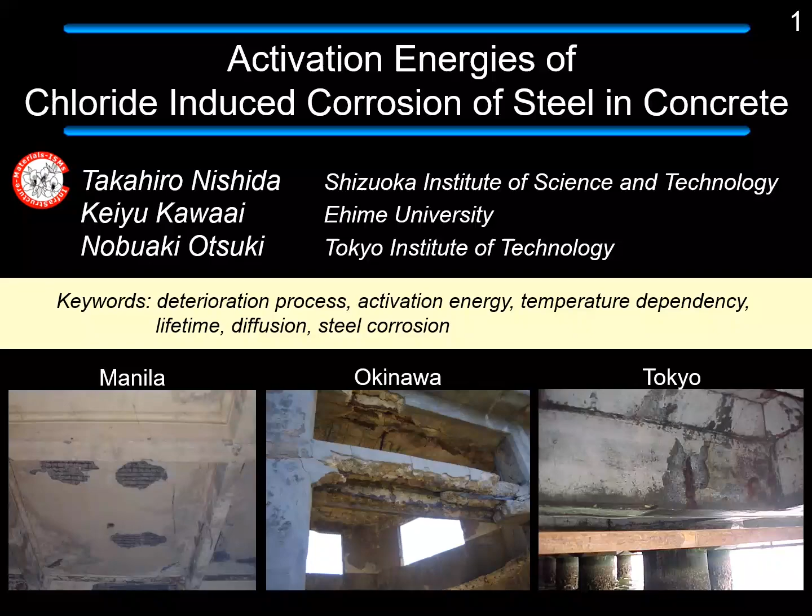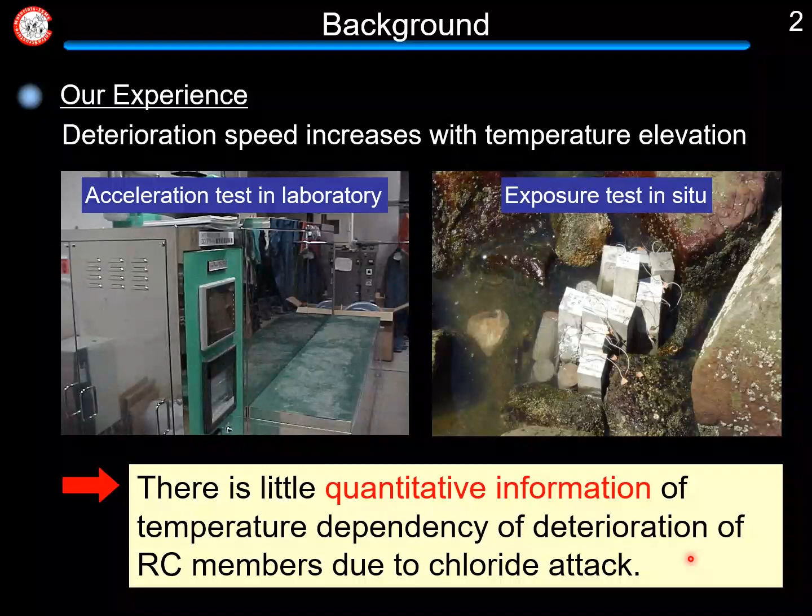Background: as our experience, it is known that the deterioration speed of reinforced concrete members increases with temperature elevation. Based on this experience, acceleration tests in laboratory or exposure tests in situ were conducted. However, there is little quantitative information on temperature dependency of deterioration of RC members due to chloride attack. Especially in the case of prediction of deterioration process of reinforced concrete members, it is necessary to construct an appropriate model or evaluation method, including temperature effect as a parameter.

From those backgrounds I mentioned, the objectives of this study are set as follows. First, to investigate the influence of temperature on chloride ion diffusivity and corrosion rate of reinforced steel bars in concrete induced by chloride attack. Second, to study temperature dependency of chloride ion diffusivity and corrosion rate based on activation energies calculated by Arrhenius theory. Third, to clarify the influence of temperature on deterioration process of reinforced concrete due to chloride attack, based on the predicted result using activation energies with temperature profile in each city.

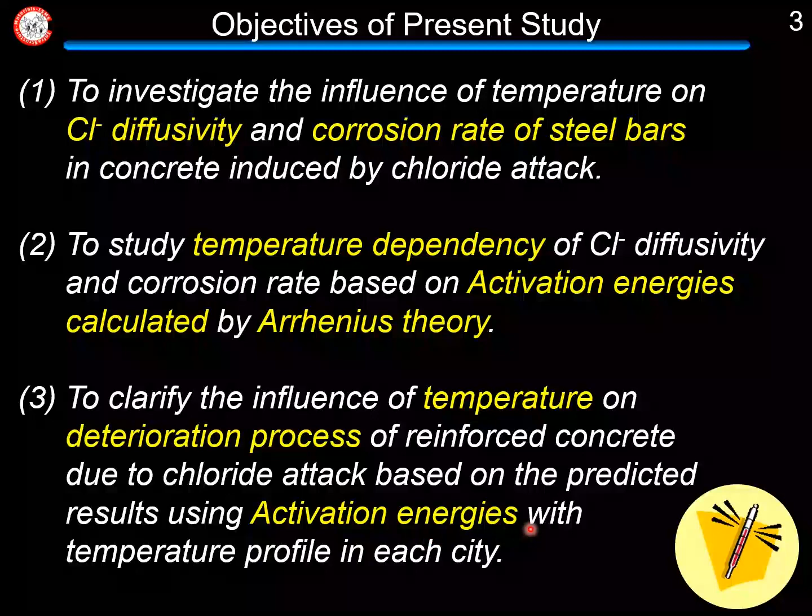First, I would like to explain the result of temperature dependency of chloride ion diffusivity. You can see the testing procedure here. In this study, 5 by 5 by 0.5 mm test pieces taken from concrete were used for investigation. The test piece, formed by epoxy resin, was set in the diffusion cell as shown here.

Both of the cells were filled with 3% sodium chloride and saturated calcium hydroxide respectively. This diffusion cell was exposed to an air-controlling chamber set at 20, 30, and 40 degrees centigrade, and the chloride ion concentration in saturated calcium hydroxide was measured every day. Then the chloride ion diffusivity was calculated by Fick's law. As shown in this graph, it was confirmed that the chloride ion diffusivity increases with temperature elevation.

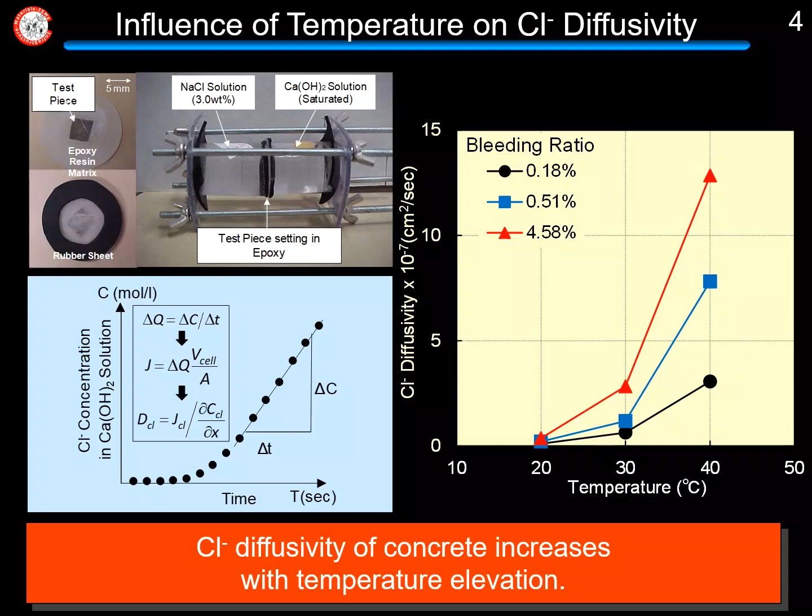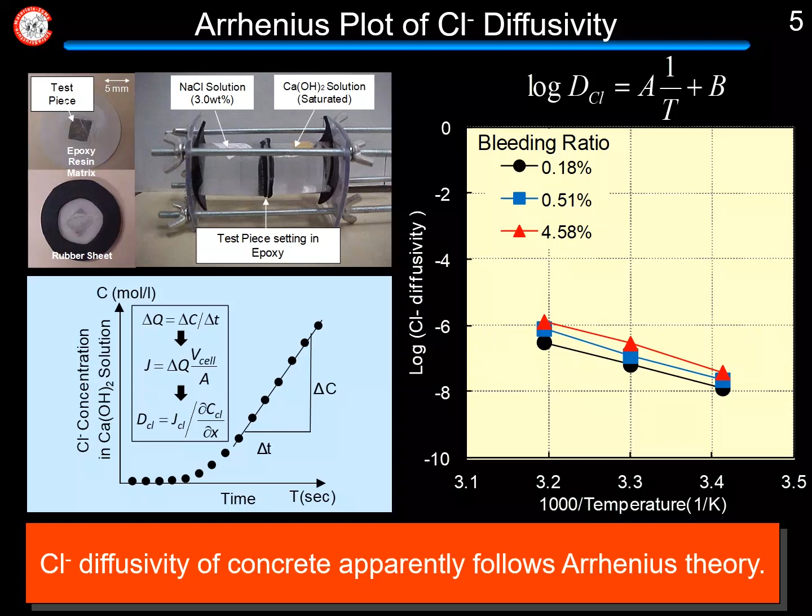Also, this figure shows the relationship between the logarithm of diffusivity and the reciprocal of absolute temperature, called the Arrhenius plot. From this, we can obtain that the chloride ion diffusivity follows Arrhenius theory. The Arrhenius equation can be expressed as shown here, and this equation can be translated as follows. Also, we can obtain the slope of the Arrhenius plot, so the activation energy can be calculated from this equation.

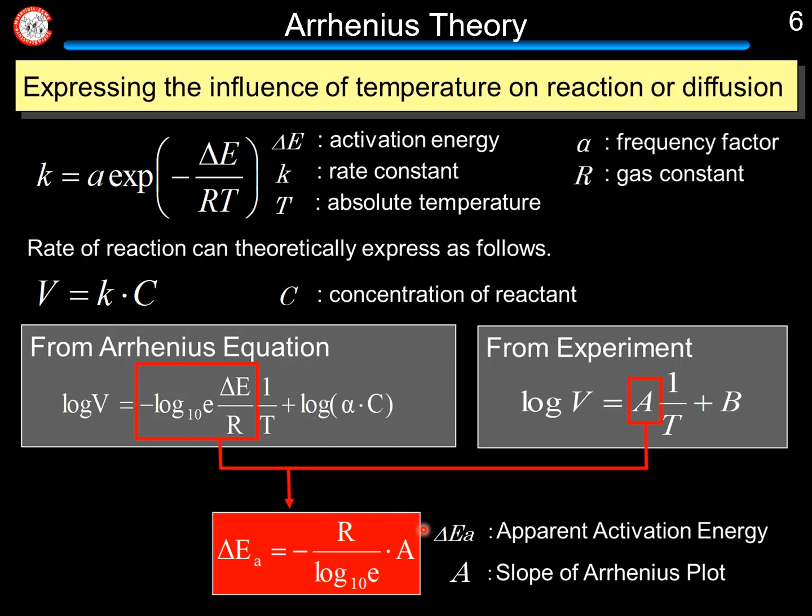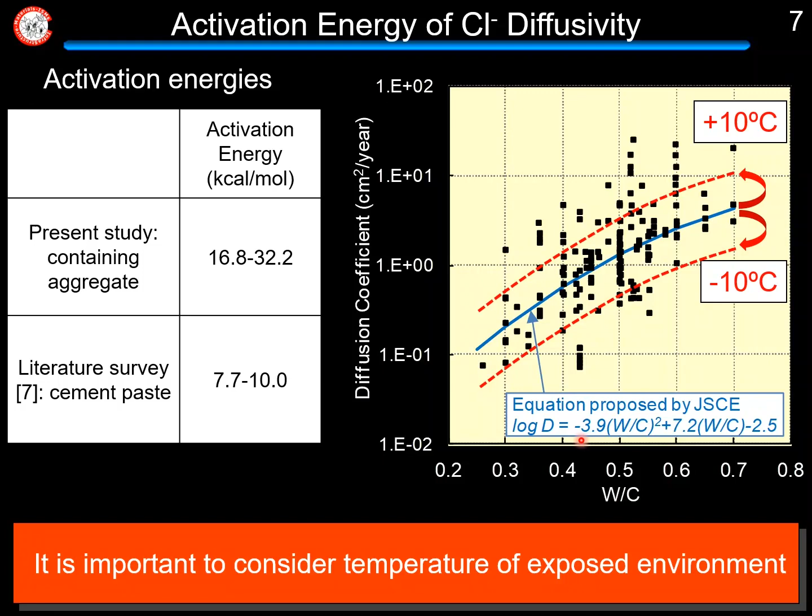This table shows the activation energy obtained by this study and by literature survey. The right side shows the relationship between chloride ion diffusivity of concrete and water-cement ratio proposed by JSCE standard specification. And the broken line in this graph shows the chloride ion diffusivities considering a plus-minus 10 degree difference against the JSCE equation, using the obtained apparent activation energy. From this graph, it is observed that the scattering of chloride ion diffusivity in the literature data seems to be explained by temperature effect. Therefore, it can be considered that the temperature profile is one of the most important factors when we check the diffusion coefficient of chloride ion in the design stage.

On the other hand, the anode and cathode are uniformly distributed in the case of microcell corrosion.

In the present study, in order to separately evaluate these corrosion formations, divided steel bars are used. The divided steel bar consists of some small steel elements, and neighboring steel elements are connected by non-electrical conductive epoxy resin, while these elements are electrically hooked up by lead wire. Using this divided steel bar, we can obtain macrocell and microcell corrosion rates separately.

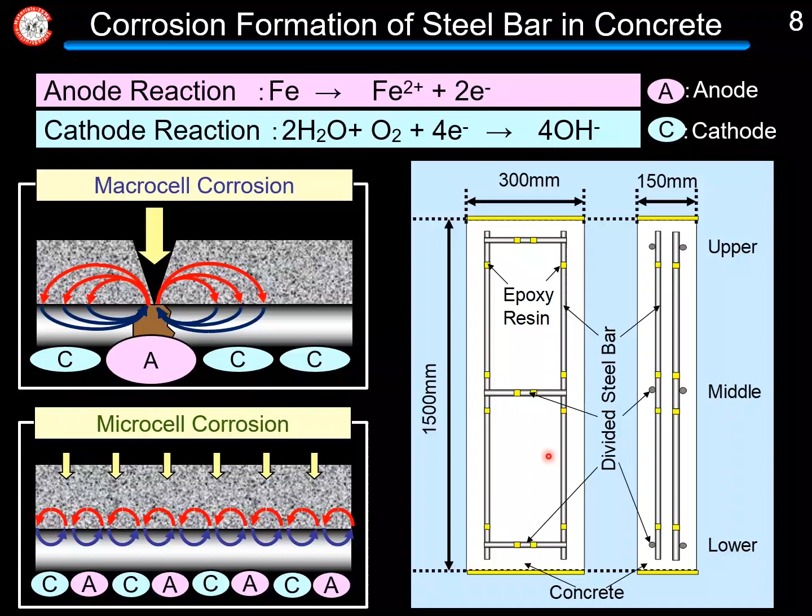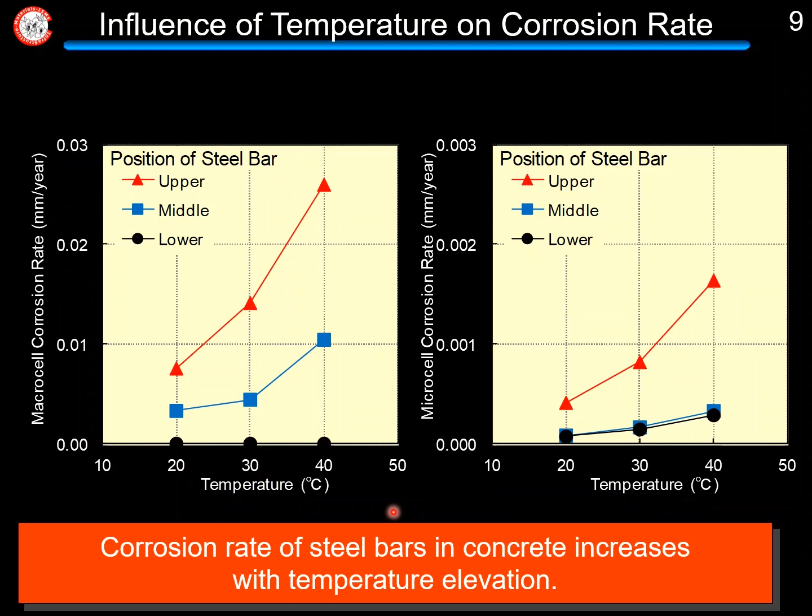This slide shows the temperature dependency of macro and microcell corrosion rate. From this graph, you can see that both corrosion rates of steel bar in concrete increase with temperature elevation. Additionally, macrocell corrosion in concrete is relatively higher than microcell corrosion in those experimental cases. Those graphs show the Arrhenius plot of corrosion rate of steel bar in concrete. From these results, it can be said that both corrosion rates apparently follow Arrhenius theory.

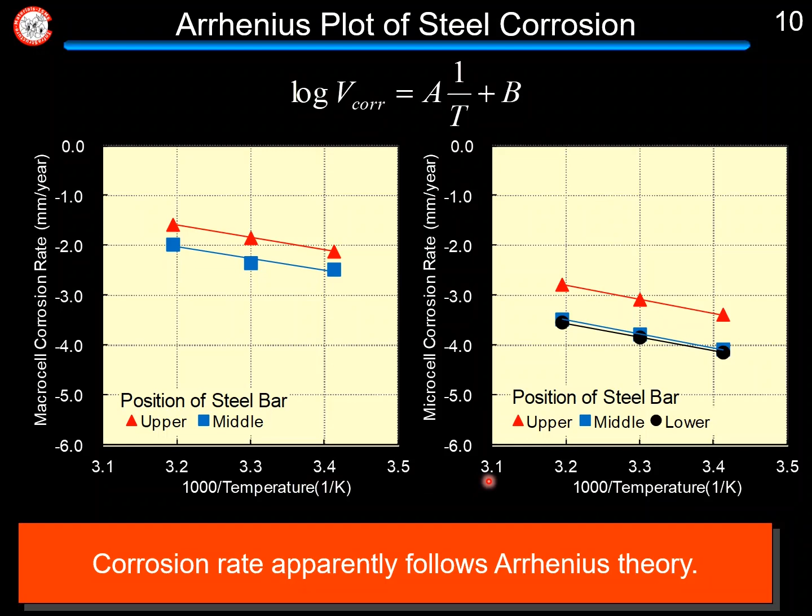This graph shows the relationship between activation energy and concrete resistance obtained by experiment. From this, it can be seen that the Arrhenius activation energy of macrocell corrosion tends to change with increase of specific concrete resistance. On the other hand, activation energy of microcell corrosion is almost constant regardless of specific concrete resistance. So there is a possibility that macrocell corrosion becomes much higher in warm temperature regions, and it needs attention.

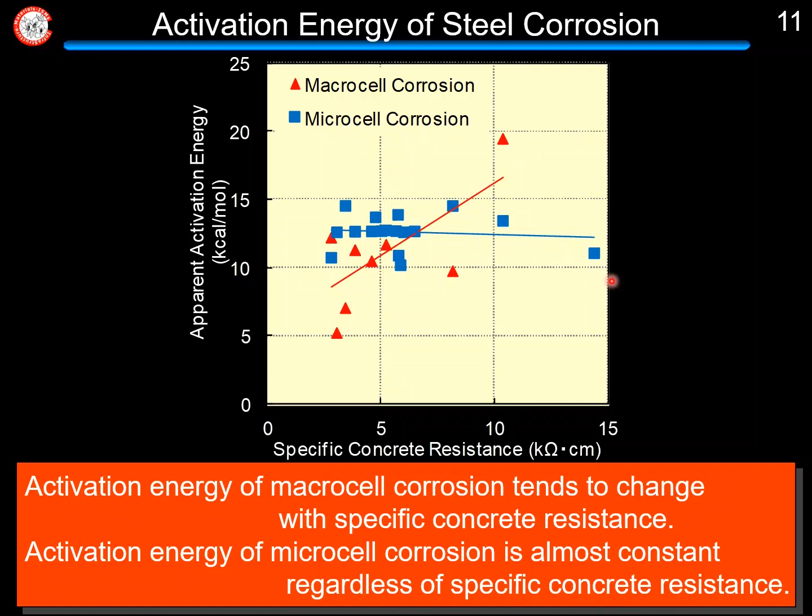Based on the experimental results mentioned before, the prediction of deterioration process was conducted in this study. This conceptual diagram shows the deterioration process of reinforced concrete as denoted in the Japan Society of Civil Engineers Specification Maintenance Edition. According to this specification, the deterioration period can be separated into initiation, propagation, acceleration, and deterioration periods.

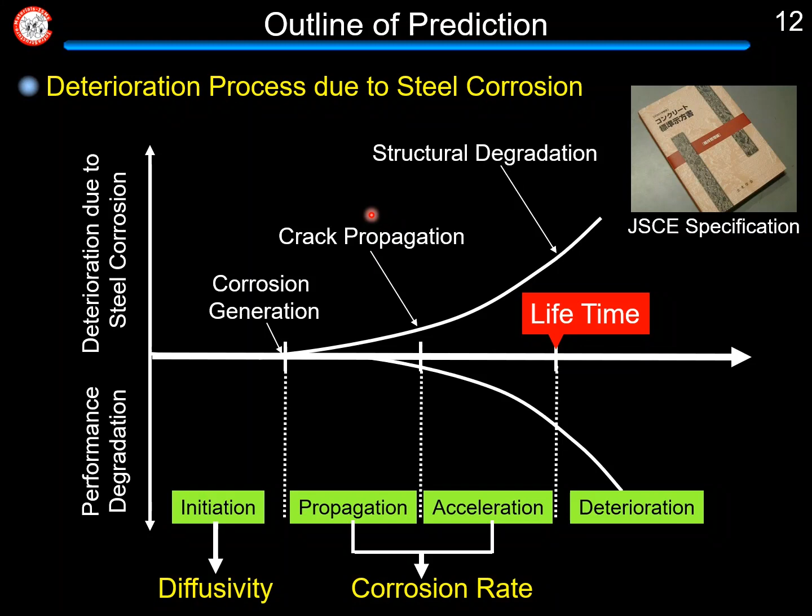Especially, the initiation period is highly related to diffusion coefficient, while propagation and acceleration periods are related to corrosion rate. Therefore, these periods are predicted based on the experimental results, and the lifetime is calculated as the sum of initiation, propagation, and acceleration periods in this study.

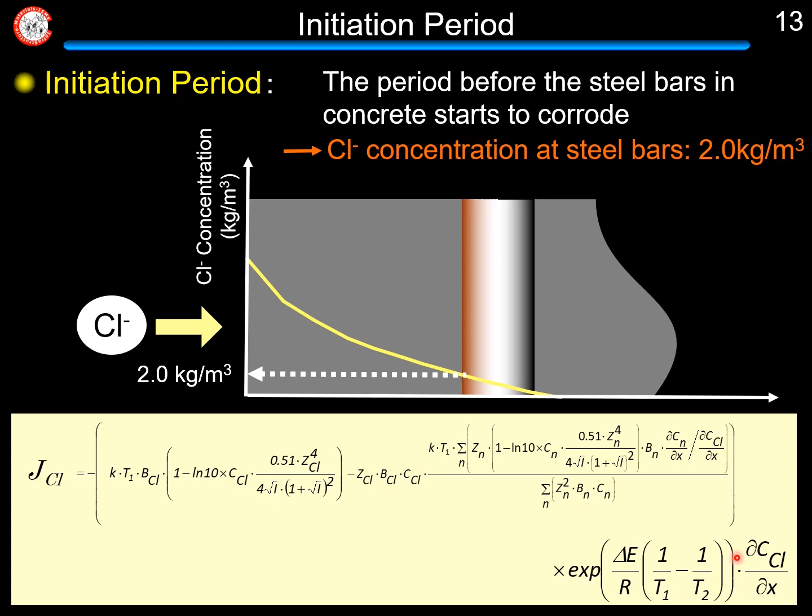In the case of calculation of initiation period, the period for chloride ion concentration to reach 2.0 kg per cubic meter is calculated by this equation. This equation is based on the Nernst-Planck equation considering Debye-Hückel theory and electroneutralization condition, as proposed by the authors. In this study, this equation is improved using the temperature dependency obtained before.

Also, propagation period and acceleration period are calculated as shown in this slide. The corrosion quantities for propagation and acceleration periods are set at 10 milligrams per square centimeter and 510 milligrams per square centimeter respectively, as indicated in the literature reviews.

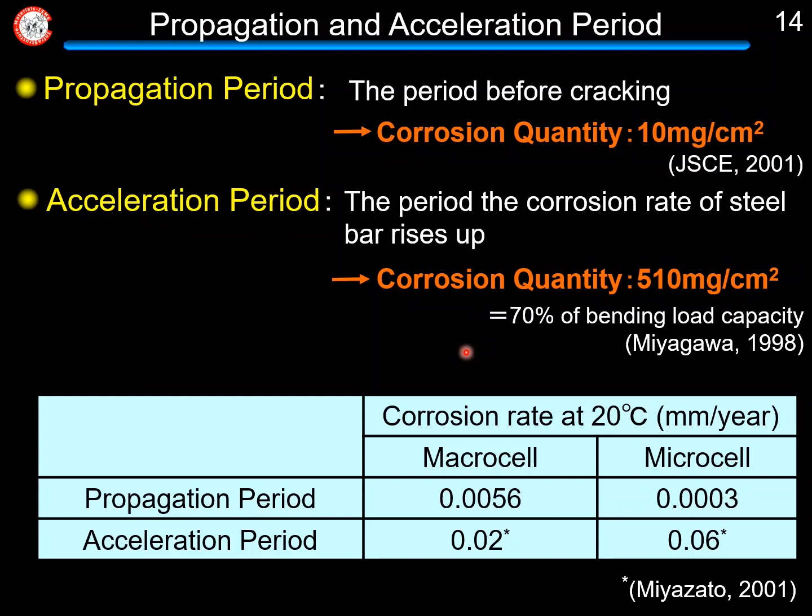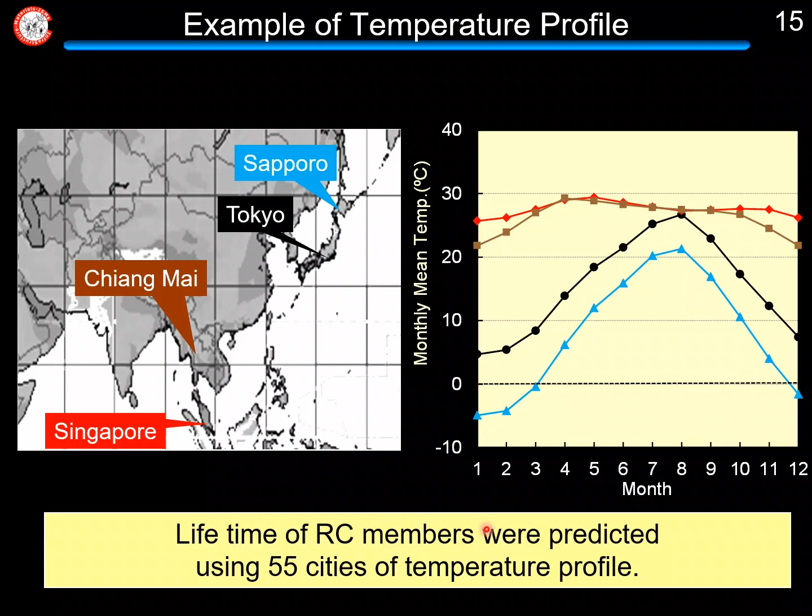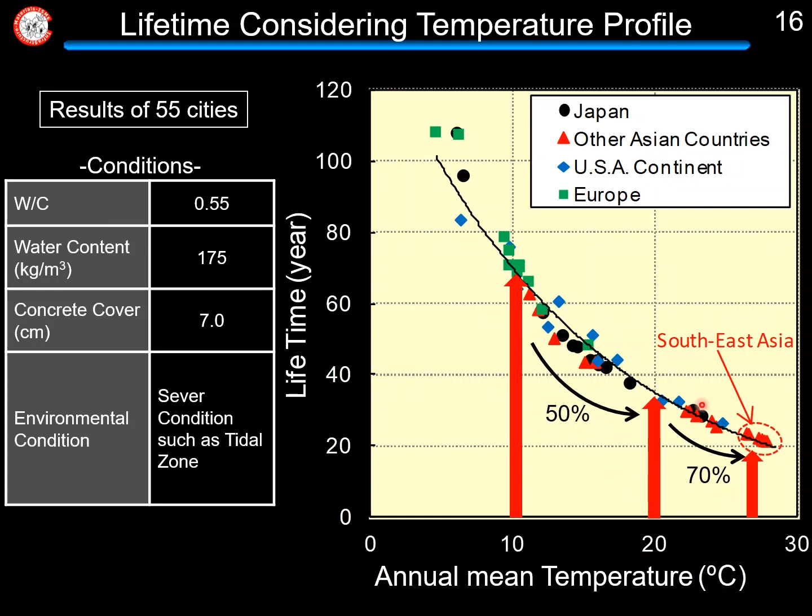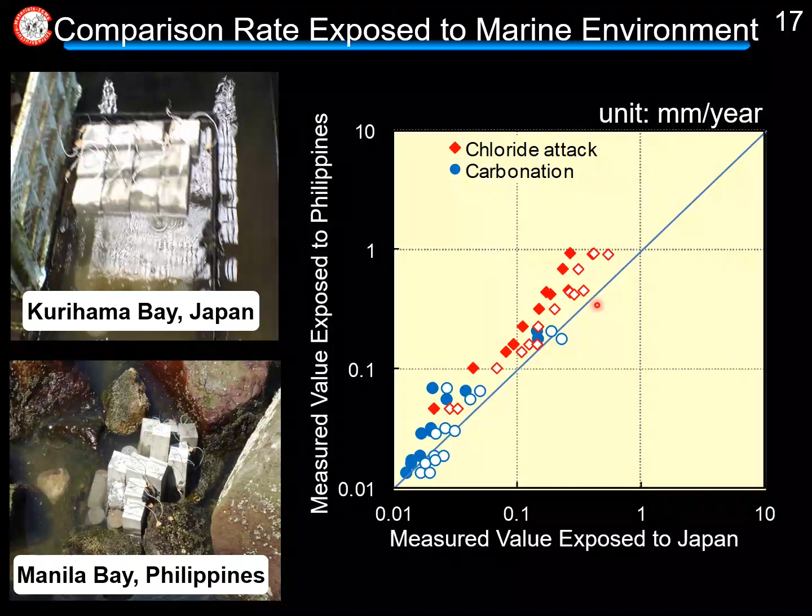To compare these data, the corrosion rate exposed to the Philippines is higher than Kurihama Bay. Considering the Arrhenius activation energies, this Japan data can be translated like this. When we consider the temperature effect, both values become almost the same.

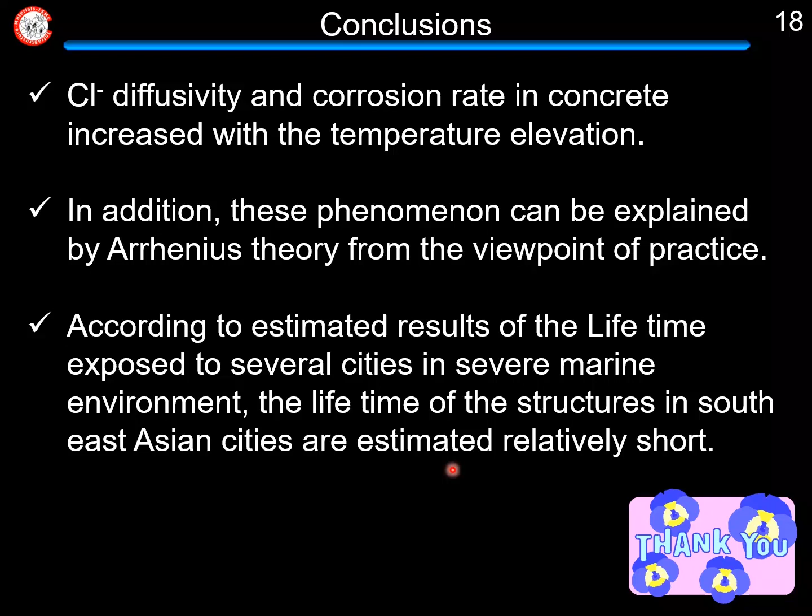Conclusions: Chloride ion diffusivity and corrosion rate in concrete increased with temperature elevation. In addition, these phenomena can be expressed by Arrhenius theory from the viewpoint of practice. According to the estimated result of lifetime exposed to several cities in severe marine environments, the lifetime of structures in South-East Asian countries are estimated to be relatively short. Thank you for your kind attention.